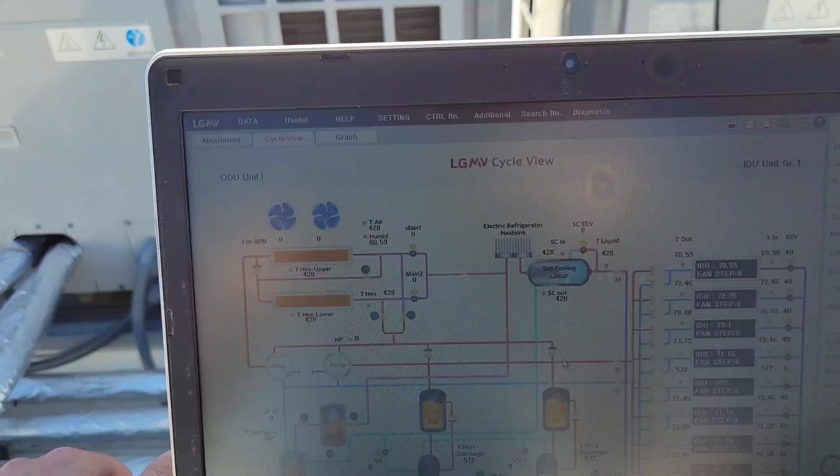No, something ain't right here. We've had a failure. I've had just some weird, nuanced stuff like this before. So we have a set of Multi V5s and we're tripping a 150 code. We'll get the laptop hooked up and you'll get to see some of that.

That 150 code is like a liquid flooding or low discharge temp. That being the case, this has got 15 heads inside with 3 condensers. You have your master and then your 2 slaves. We need to verify, one, how are the valves acting? Do we have a valve that's overfeeding?

Maybe it says on the system that it's actually in a really low step, but in reality it's way overfeeding the coil possibly, which we'll be able to see on the differential across the coil or the superheat being generated. And then the second thing is maybe we've got a temperature sensor that's just way out of whack. Yeah, so you can see here we got a 150 code.

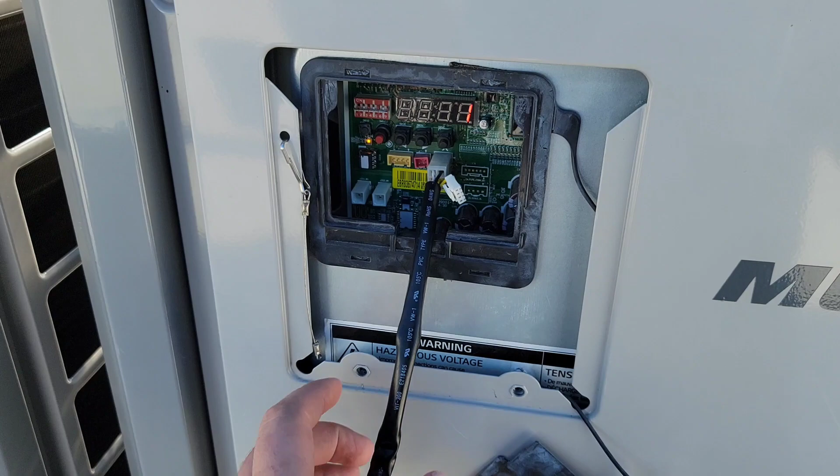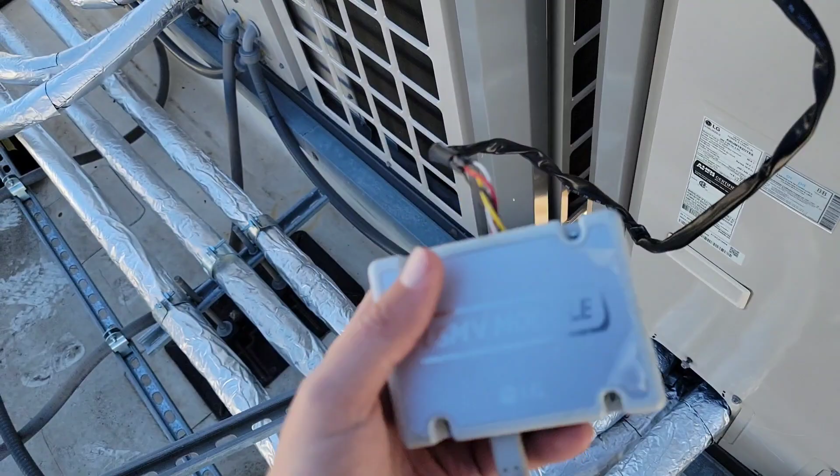If you haven't seen this before, I am going to do a video on the full hookup and navigation of this, but we do have a little plug that plugs into the main board, and then it goes into this little adapter module. There's a set of switches that you have to cycle between depending on the model and version that you're working on. So we are working on a 5, so we flipped our dip switches there to that.

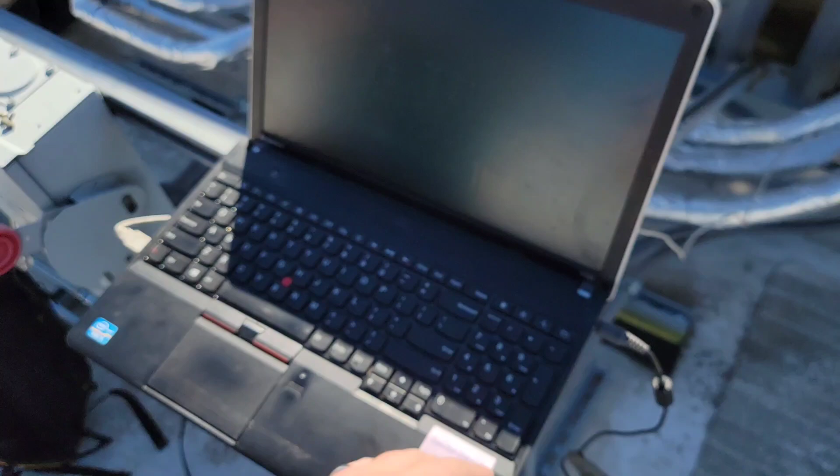What that's adjusting is the communication, like baud rate and stuff, so that this little module can communicate properly to interface with this controller, and that just plugs back in via USB into your laptop. What's critical is you have to set your COM port for that specific LGMV module once you configure it on your laptop.

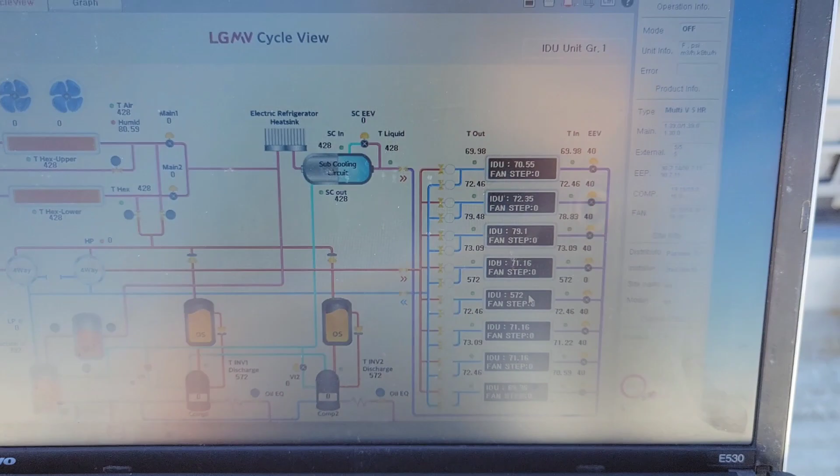The indoor temps are about the same, except for our indoor number 5. We actually are having a communication issue on that indoor unit and it's not registering properly on this side of the system. So that's a separate issue that we can dive into at a later time. The suction, 390. Oh, these are in the wrong style. Yeah, we're set to PSI. That's interesting.

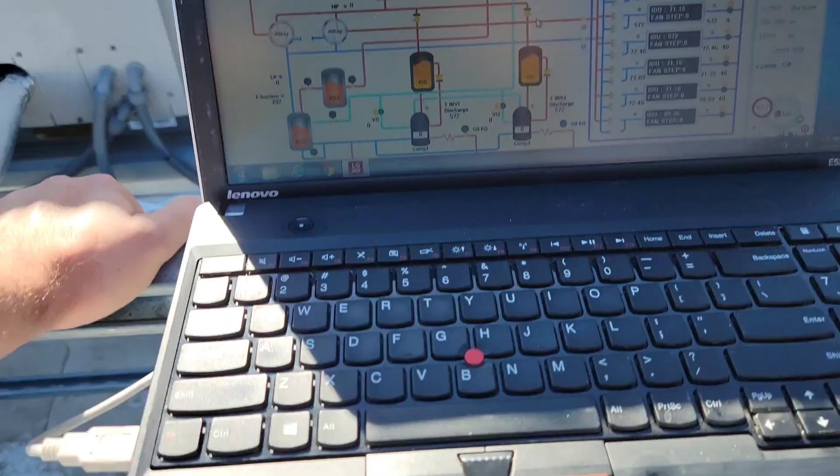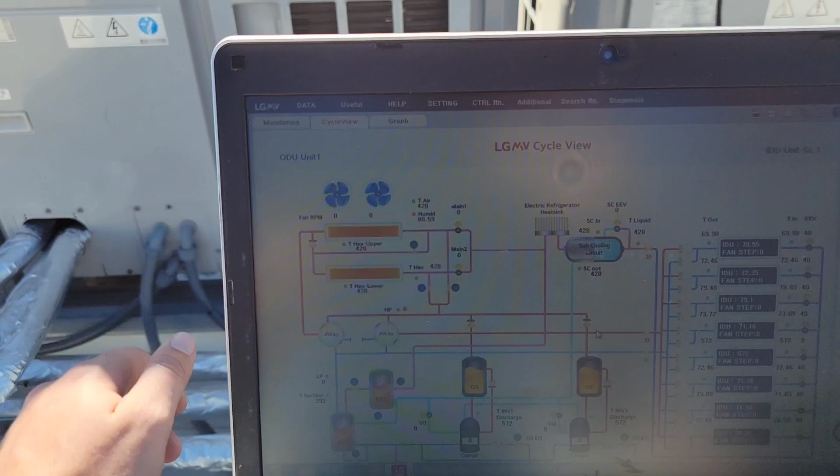Confirm. Look at those temperatures on the condenser, your discharge lines. So the 572 is what I've seen so far as the default setting when you have no sensor, when it's not communicating. All right, so all these sensors are low pressure. High pressure is not reporting. Those show 0. Something ain't right here. We've had a failure, because all those readings should not look like that.

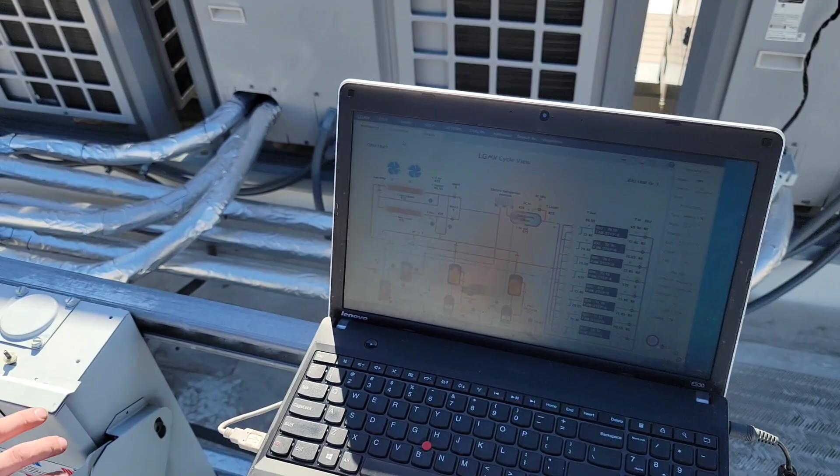We'll do a power cycle on it. We'll hit all 3 of them. No, you want to disconnect here first. Yep. Now we'll let everything sit for a couple of minutes. Being the fact that those numbers came back the way they did really makes me question if we had a control board or something fail, or I don't work on these every day like I used to, and I'm completely blanking on why it does that.

So the power cycle cleared our alarm, which was one of the goals. We did want to clear that at this point, but 2, we do have all of our readings coming in the way we wanted them to. So yeah, something was definitely going on with that, and I find that concerning. And I could be wrong.

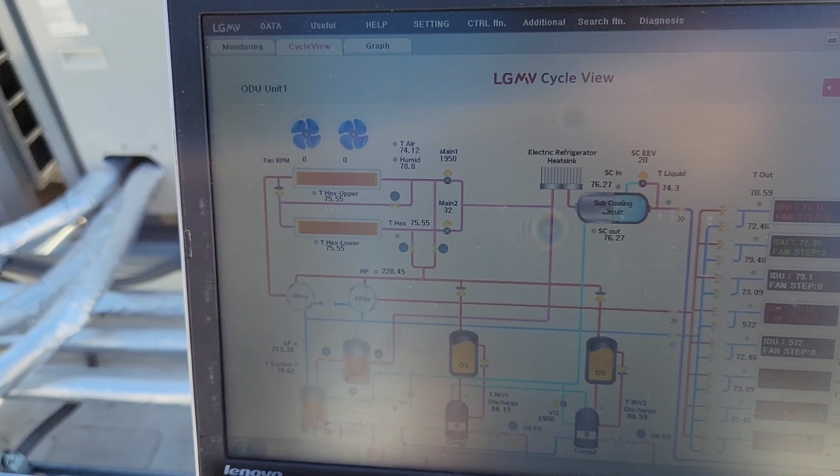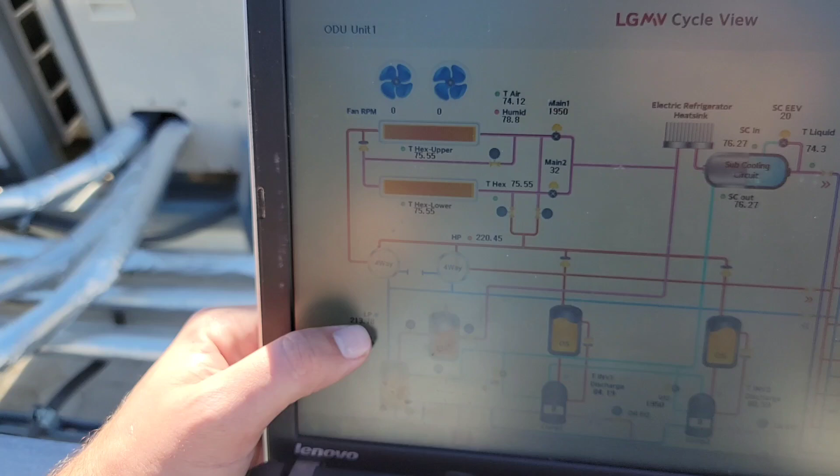Y'all could give some input in the comments, but I don't believe that a 150 code is going to lock out a control module to the point where we're going to start throwing random readings that shouldn't be there. We weren't reading any pressure on either low or high transducers, and then our suction temperature was like 300 and something. No, that ain't right.

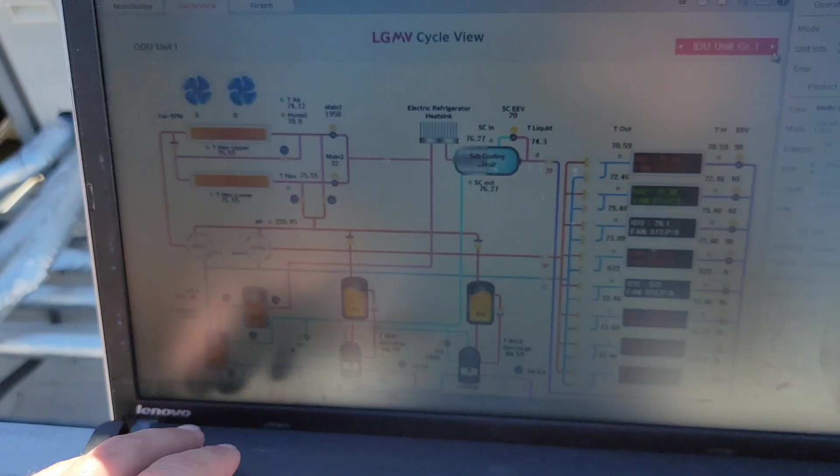Anyway, regardless, the indoors are reporting in, except for one. We still have one of them that doesn't look like it's communicating. This is an HRU, so it's a heat recovery unit, so we may have some in cool, some in heat. Looks like it's probably going to go into heating. We got way more heat calls than we do cool calls.

Granted, it didn't help that it's only, yeah, they're all taken off. It's only what, 70 degrees? It's not even that, probably 65. After we've had like 20 to 30 degrees for, I don't know, a week? Yeah, cold.

I ended up deciding to do a full power cycle again. We're having trouble with 1 and 2, getting them to have a stable COM. What I'm hoping is, we left these off for a solid 5 minutes or so, because the first time we only did it for maybe 30 seconds. I really want everything to completely cycle down and settle down and then try to come back up.

System 3, or slave 2, has been running perfectly fine. We hadn't had an issue with it, and we can see all the readings on it, but we can't on 2 and 1, which is the master and slave 1. So I really want to see those readings. Now keep in mind, the 150 code is a cooling only error. So what that means is we've been running in heat mode, and right now I just want to see the thing operate in general.

What we'll end up doing is we will cycle this into a test mode, which will force it into a full cool, and we'll be able to then see what's happening. Now, doing a little bit of reading on the manual, we were able to confirm that the only way you can trip a 150 is if all the indoor heads are in a cooling mode.

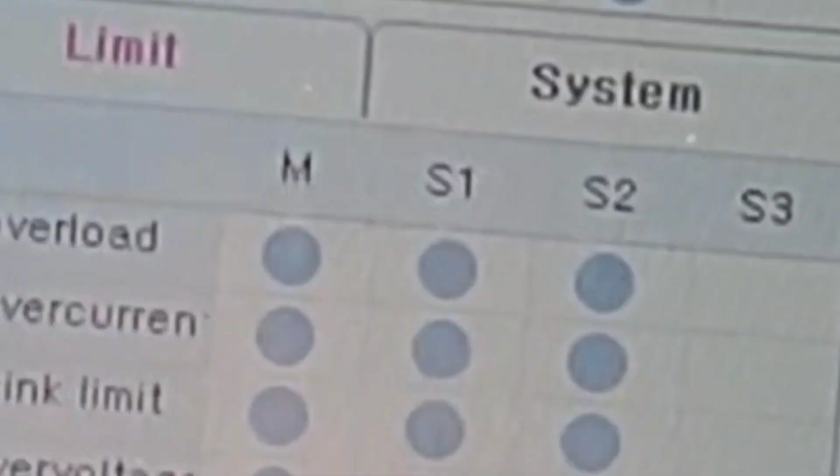We know that it wasn't some kind of weird cold weather day or something like it. Whatever happened, we had to have had enough load on the building to have the entire building in a cooling mode. There are some definite things going on here, but what we've come to so far is we're currently ramping up, and we've got the whole system in cool mode. We did a manual override, lock everything in, drop all the indoor temps, and so far everything's looking okay.

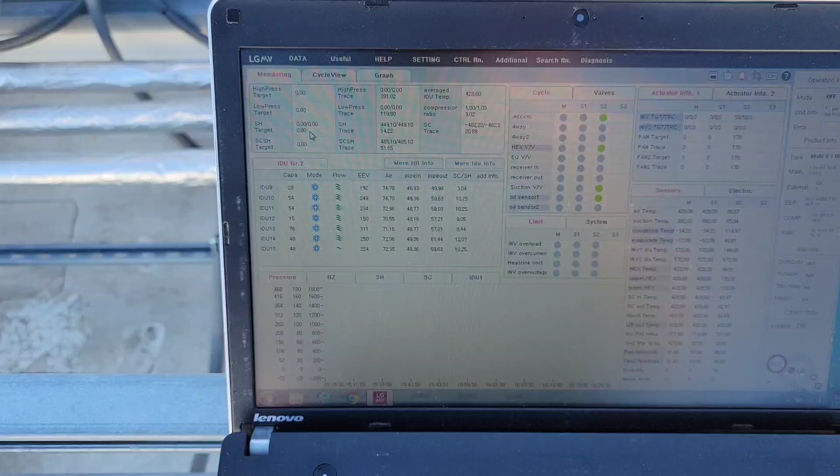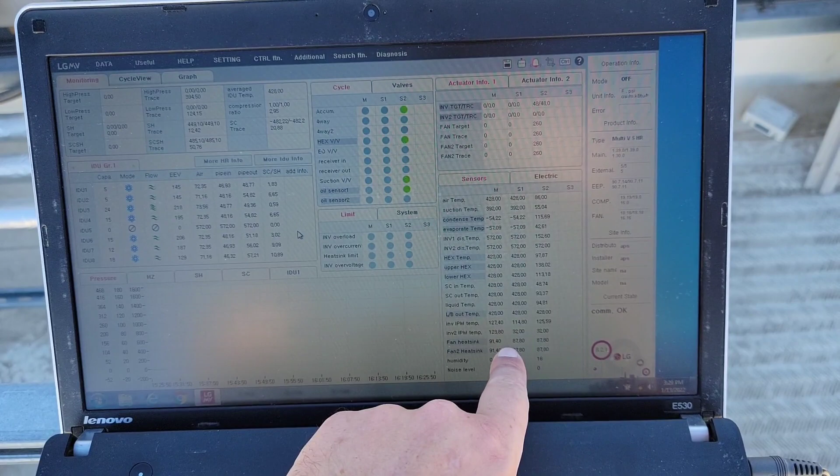We do have this one box, IDU 9, that is trying to keep the superheat up, but I mean it's doing fine. These things run pretty low on superheat to begin with. I've not been able to resolve why the master and slave 1 are not coming in, and specifically the inverter temperatures are coming in, but the rest of them aren't.

Now you would think that the external PCB board on the bottom there would be the problem, and so did we. Those are the identical boards between these two units. We did trade them between 1 and the master and slave 2 just to see how the system would respond, and it made absolutely no change. We still do not have any of those points on the master, and slave 2 is still bringing them all in without any trouble. So not really sure what to think of that, to be honest.

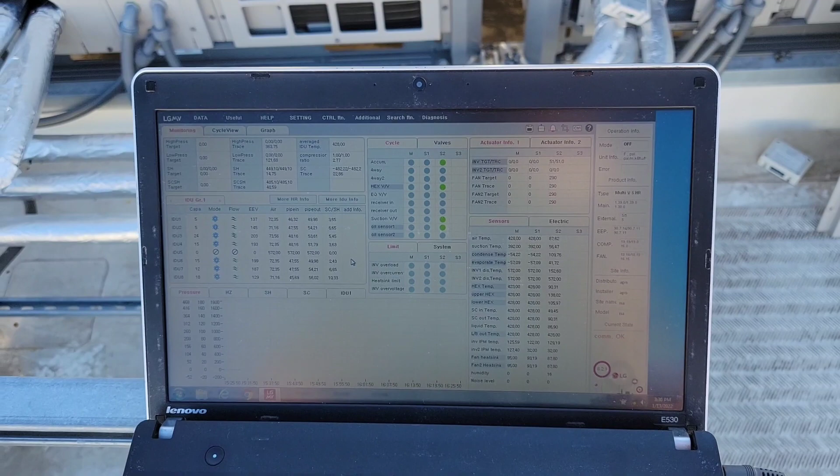I sat on the phone for about, I don't know, hour and a half with tech support, got absolutely nowhere, so I'm not going to waste any more time on that today. Right now my focus is, I can see S2. All of these should be really close to each other. Short of just being able to completely verify every one of these sensors, I can kind of get an idea on how we're running overall.

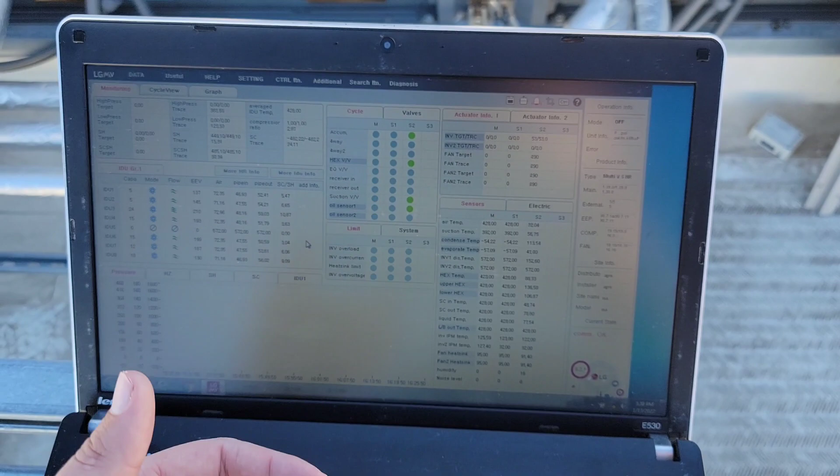We've got some kind of strange communication issue between the units and the boards. Not really sure honestly what is going on. If you have any input, I'm happy to hear it, because I would like to know why I can't get these points to pull in. Again, if I could get tech support on the phone, maybe that would help.

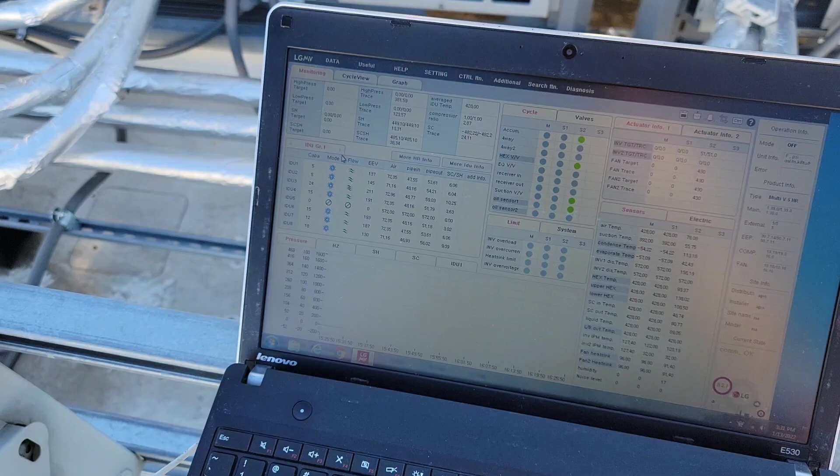What I can see is, we're loading up. We're not having to run the EEVs super high. If anything, they're running a little low, which is a good thing, because that means we don't have like a charge issue or anything, which is one of the major things we want to verify, is to make sure we're not low on charge, which I definitely do not think is the problem.

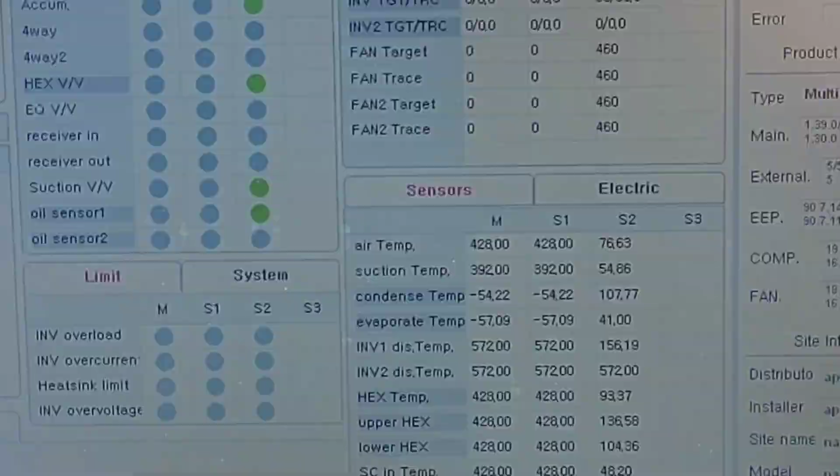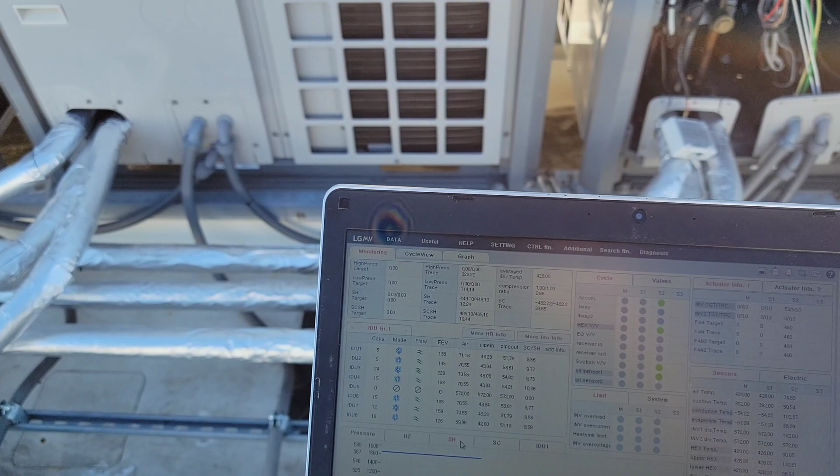Yeah, we've been running really solid for a little while now. Our superheat's doing fine. Our subcool's right where it needs to be. Our EEVs and coils are doing really well. Other than some communication problems, which we can work out and resolve as we go. Sometimes, to be honest, I've had just some weird, nuanced stuff like this before, come back in a couple of months for another inspection or something, and everything just worked perfectly fine. So we'll have to talk to the customer a little bit deeper and see if he just wants us to put the time in to even try.

When it comes to physical system operation, it's doing fine, and clearly everything is working fine. It's just we're not able to see it for whatever reason, which means, yeah, something's happening. We can't pinpoint exactly what, but that's okay. At this point, I genuinely think the 150 was just some weird freak whatever. I don't know. Given the fact that I am having some weird comm problems leads me to believe that could have contributed somehow, put the system in a weird situation that made it see readings that it shouldn't have, is really the best I can say towards this. I wish I had a better answer.

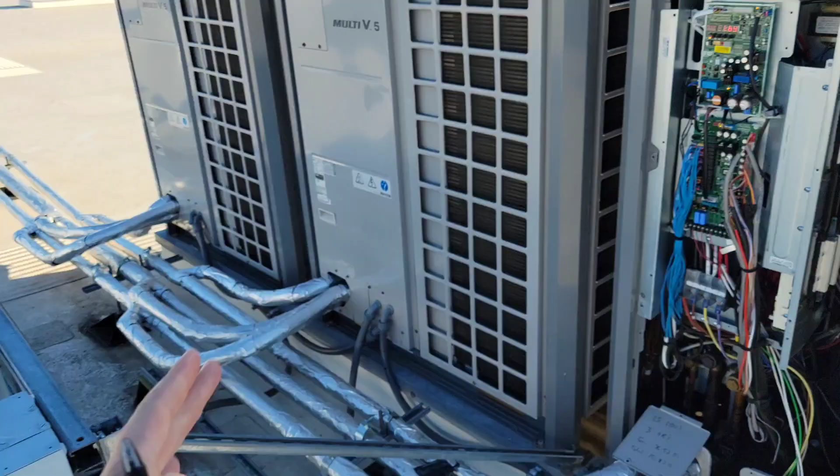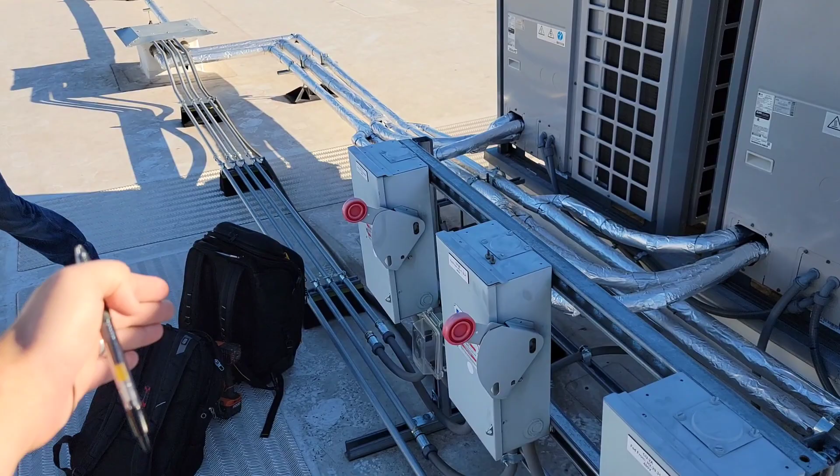Funny thing, guys, we're packing up now, but I was doing a training video on how to go into the test mode and whatnot, and start that cycle. And as I was doing a test mode from the laptop, it actually triggered the communication module, or the main PCB, and it started communicating. Like all of a sudden

master and slave 1. Sometimes you get these finicky little bugs and you can chase them for hours, and you just click one button and it cycles some random parameter that a power cycle wouldn't do anything for, and all of a sudden everything starts talking. So you got to be careful, guys. These systems, they'll bite you sometimes.

So that was a prime example of where, you know, if I hadn't submitted it, who knows, it may have been next time we were out here to do a PM, we try to do a force test, and it did it then. Who knows. Anyway, I wanted to throw that in there before I actually took off, that we got the master and the slave 1 to actually start communicating to the laptop to the point where we could actually read readings. So yay.